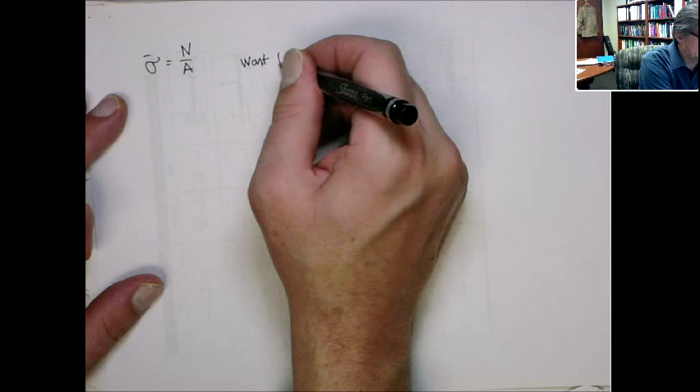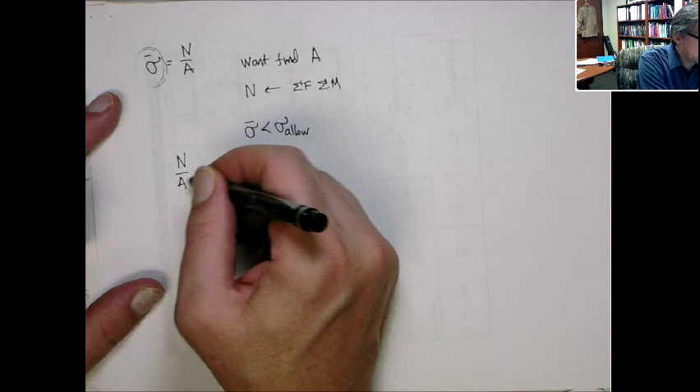We want to find A, right? We know N. We get that from sum of forces, sum of moments, right? And what do we use for this condition? Well, what we're basically saying is the stress has to be less than some allowable stress. What we're trying to do is N over A has to be less than or equal to some allowable stress.

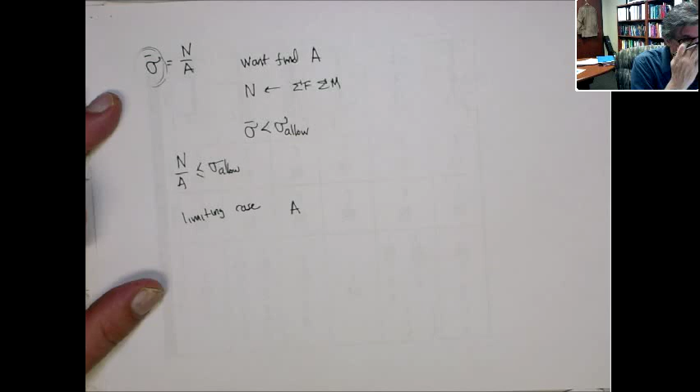So the limiting case is when this inequality becomes equality. Well, let's do it this way. So if we solve for the area, divide by sigma allowable and multiply by A, you get that the area has to be greater than or equal to the normal force divided by this allowable.

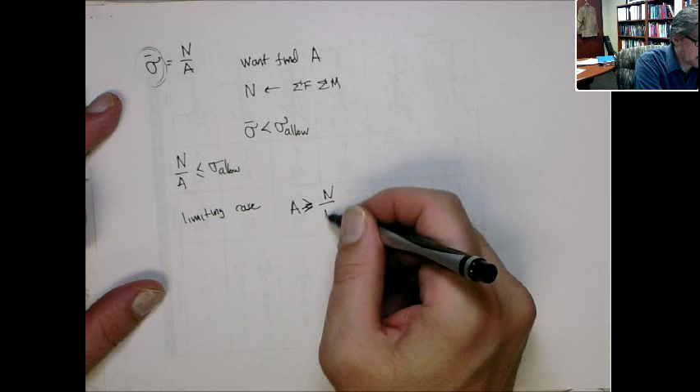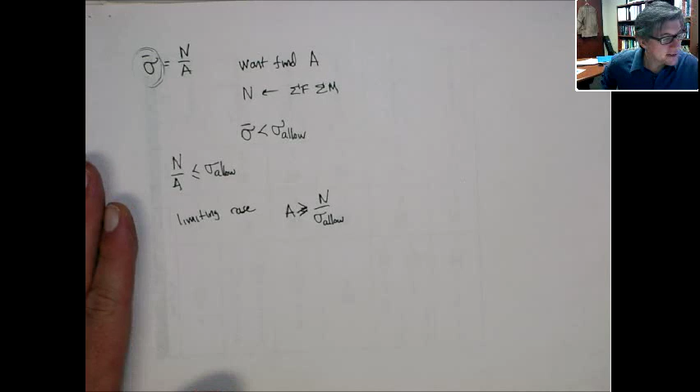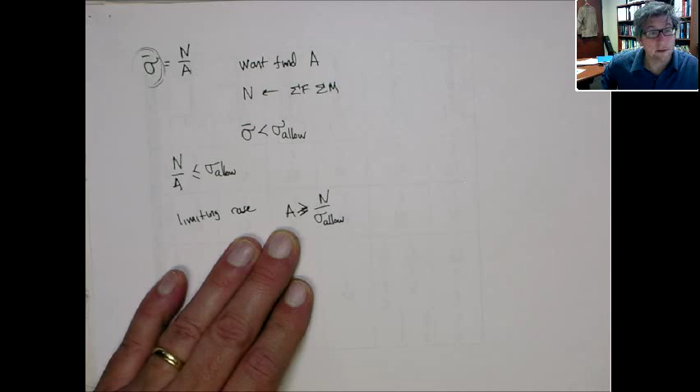Let me just pause here and mention this. This is an important thing to consider. It's always good to have in your head a feel of which way design should go. And I think this is pretty obvious, but as the cross-sectional area in this particular scenario gets bigger, the part can withstand more force, right? It's stronger. I think that's kind of obvious. But you can see it's borne out through this.

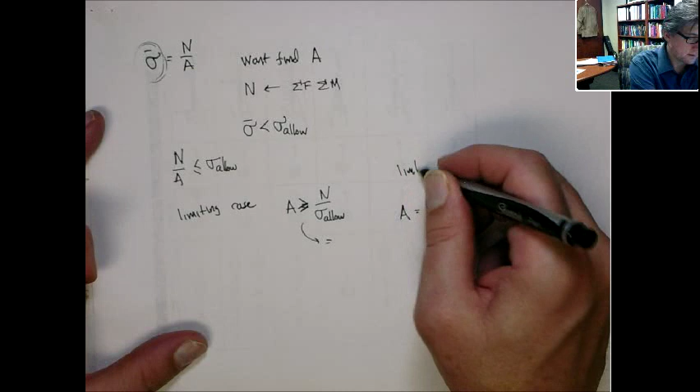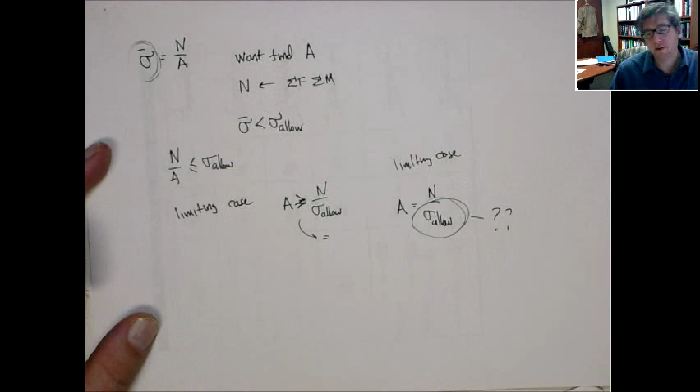So the area has to be bigger than or equal to the internal reaction force over this allowable. The limiting case is going to be when this goes to equality. You can use this to determine the area, or in the way we posed the same problem, we know the area, we know this is 3 inches. Okay. Now what is this allowable stress? One obvious thing would be the failure strength of the material. When does the material fail?

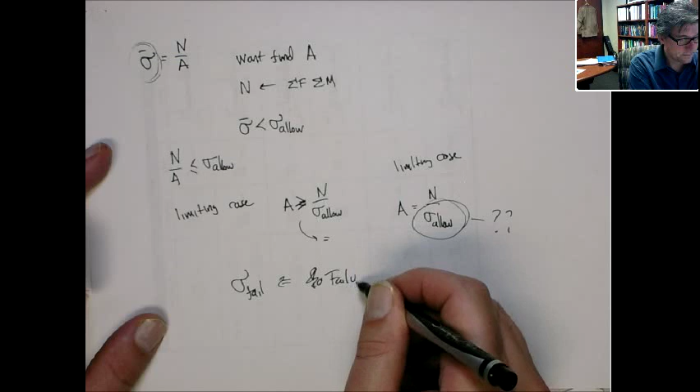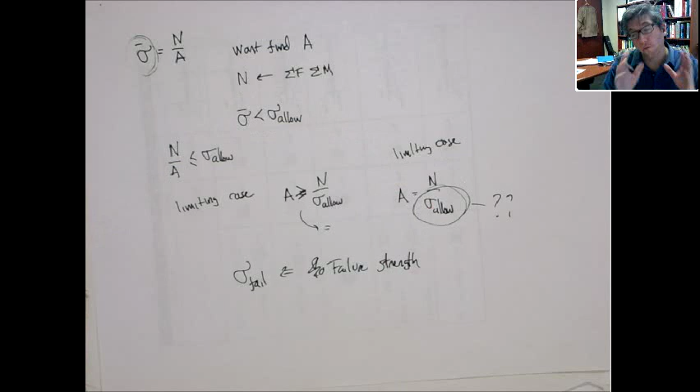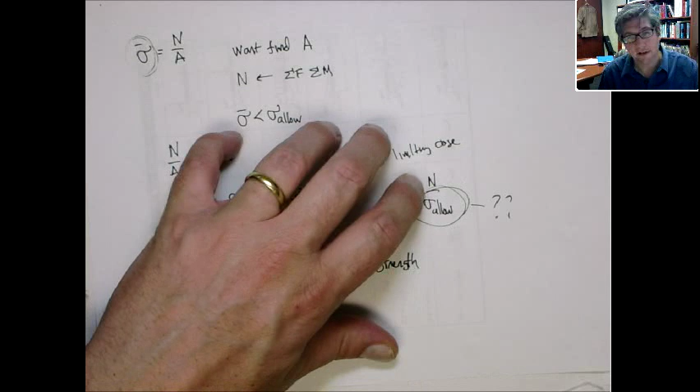This is what we call... now, you can actually test that with a sample material and a test specimen and figure out at what stress the material fails. The problem with that is if we design the area to be that, then you're right at the point where it's going to fail. So for one reason or another, the operating force might go up more than what you think it does. It will fail. Or maybe you have some material with a flaw, something else that actually makes the actual stress at which it fails a little lower than what you tested it at. Again, it fails. So you've designed this part with no margin.

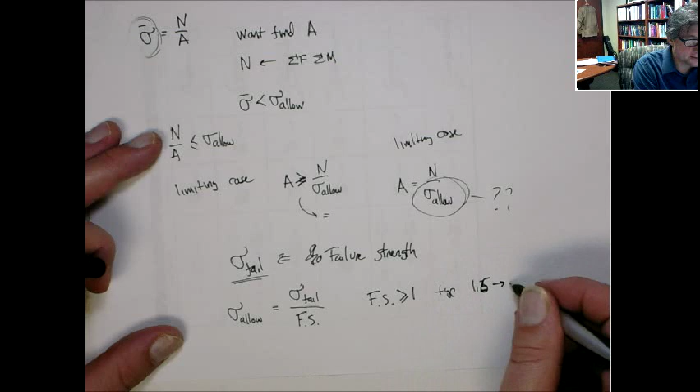That's not what we like to do. We like to have a little margin of safety. In engineering, we call that margin of safety the factor of safety. So instead of using the failure strength, we use the allowable strength as equal to failure strength divided by some number, some factor of safety. Okay? So this factor of safety is greater than, well, in some cases it's equal to 1. Typically it's greater than 1. Typical values are like 1.5, even upwards as much as 4. Okay?

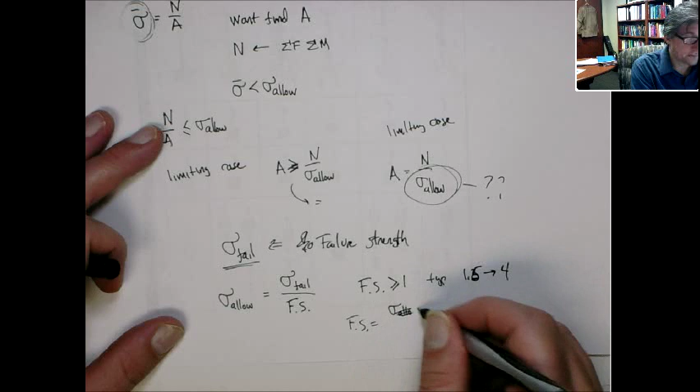So this means the allowable stress is less than the failure stress. So you're actually designed to a lower allowable stress than the failure stress. So that is the margin you have, the difference between the allowable stress and the actual failure stress. The factor of safety is the failure stress over the allowable stress. Okay? Actually, honestly, I use it this way. But the way it's used more often is this way. Okay?

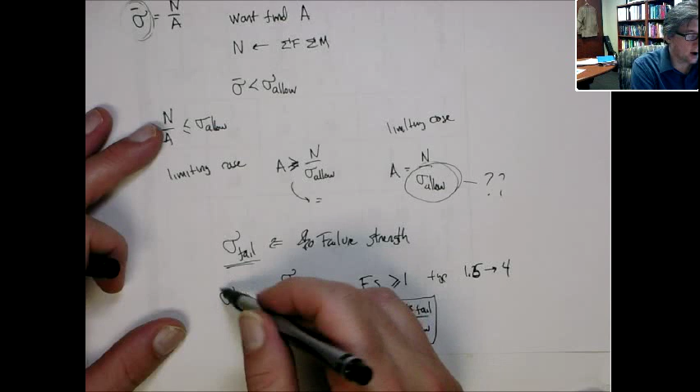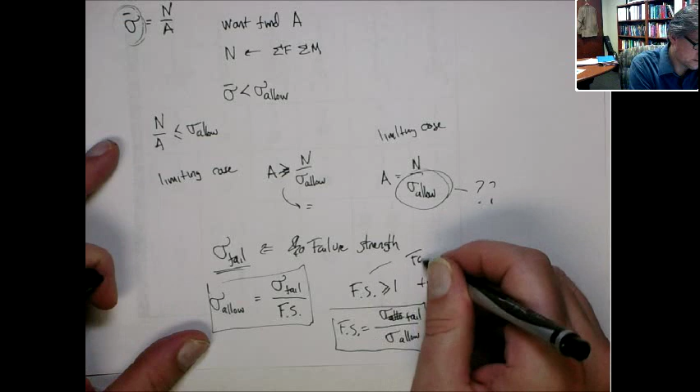Sometimes what students will forget is which is the allowable and which is the failure. You can memorize the equation. I think it's kind of silly. I think this is one of those great examples where it's not an equation you want to memorize, but a concept. The factor of safety, right, is a number that's always greater than 1. It's how much margin you basically have. So if the factor of safety is greater than 1, then the allowable stress obviously has to be less than the failure stress. So that tells you that failure stress divided by the factor of safety is allowable.

Not the factor of safety times the failure stress. That way the allowable stress would be greater than the failure stress, and obviously that makes no sense. The negative margin, right? You're doomed. The airplane is going to crash. Okay? All right, so that's the notion of factor of safety. So let's go back and revisit this problem and just do a real quick example. These concepts are simple, but they're also very important, and I think it does bear some time.

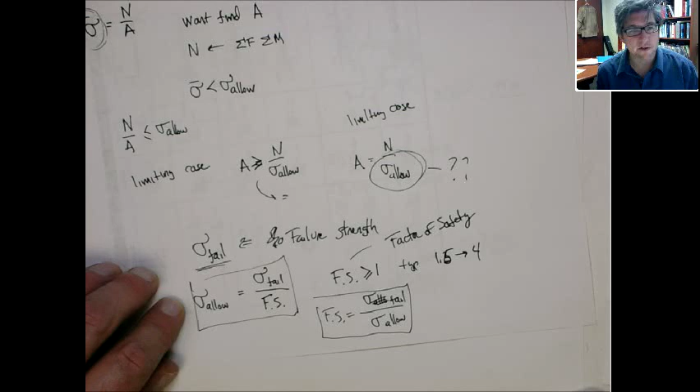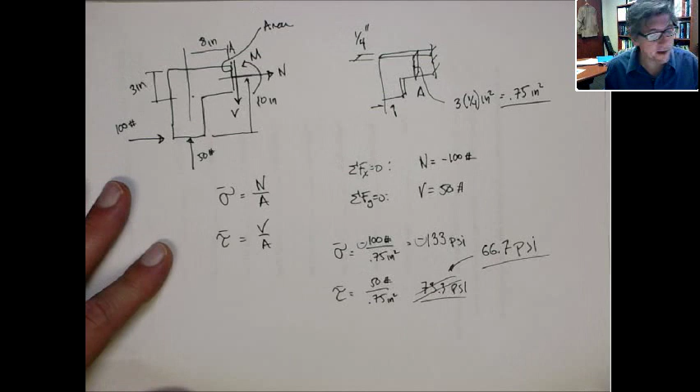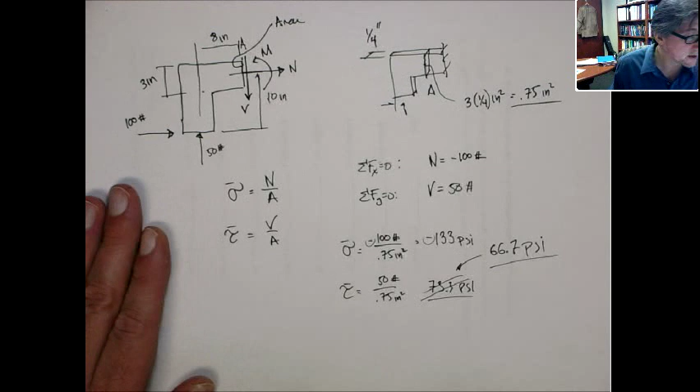Again, this is one of those cases I want to pause. Don't just memorize this equation. Don't just memorize divide failure by factor of safety for allowable. Think about the concept that's going on, what factor of safety is. It's not that hard. We're not talking about quantum mechanics, but this notion of developing a design sense or engineering intuition is really, I think, a strong skill to have. Everybody should always be trying to develop this to become a better engineer. All right, so let's do this as an example.

Let's look at this case. Let's say we don't know what this thickness is. Let's find the thickness. We have to design the appropriate thickness. Let's say that we're using some sort of plastic material, where the normal failure stress is 300 psi. We want a factor of safety, in this case, of 3. We want to be really conservative. So if the failure strength is 300 psi and the factor of safety is 3, that means we have to design this to an allowable stress of only 100 psi. The failure stress is divided by the factor of safety. This is what we're designing to.

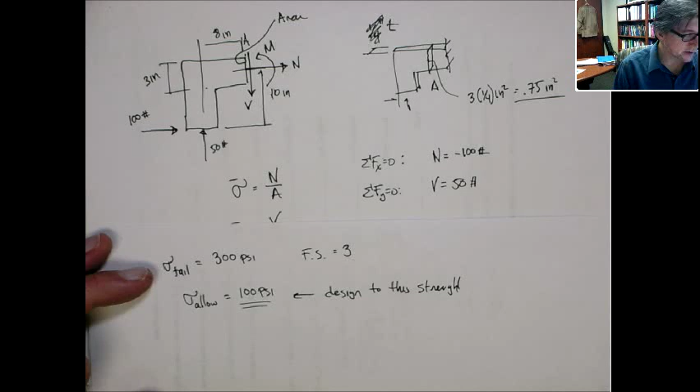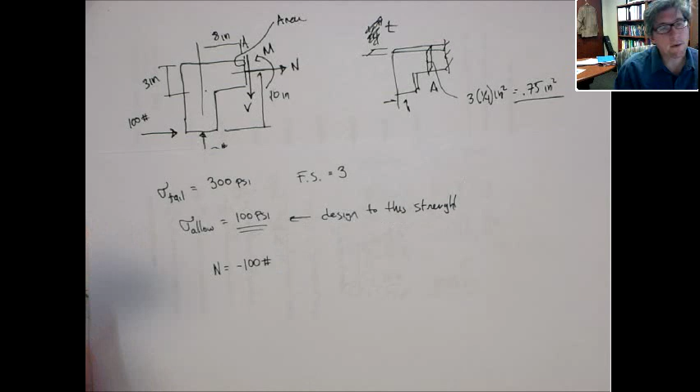Another way to think of it is we're considering allowing the material less strength. All right, so if that's the stress we're designing to, it's the same geometry up here, so the normal force is still minus 100 pounds. So this is compression. Now, for most materials, unless it's stated otherwise, when you have a failure strength, let's assume it is the same in compression and tension. Sometimes we have different compressive strengths. Let's assume it's the same. All right. So we need to figure this out.

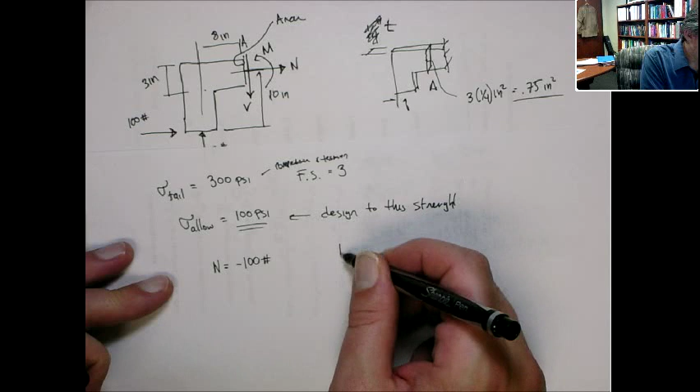Normal force over the cross-sectional area needs to be less than or equal to this allowable stress, right? That's our design equation. And we need to find A. We know that A, in this particular case, is going to be the thickness times 3 inches. That is that cross-section. Okay.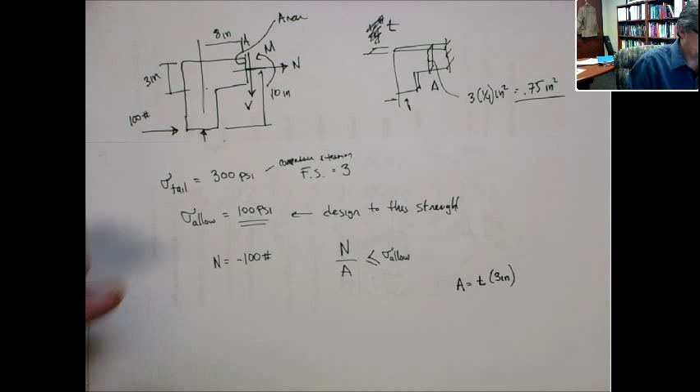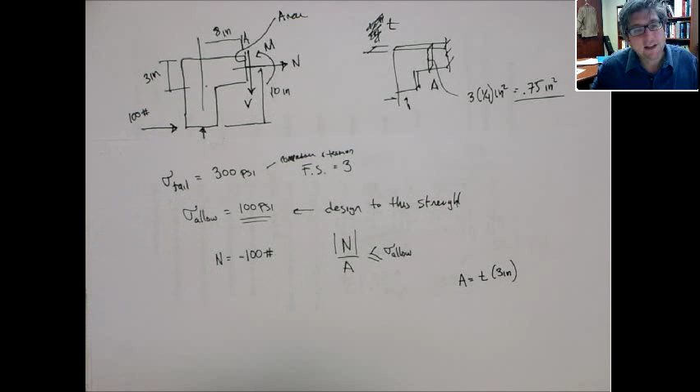Now, let's just talk about the sign. Obviously, if I put the negative in here, this becomes a negative number. So you really want to look at the absolute value. I think this is kind of obvious. I don't want to get too much into the math of it, but in this case, we're looking at the absolute value. If you did it without considering the absolute value, you would keep increasing the compressive load to infinity, and you're always going to be less than your negative number. So it's really the absolute value. Okay.

All right. So let's find the area. In the limiting case, the area has to be greater than or equal to this force, 100 pounds, divided by the allowable stress, which is 100 pounds per square inch. The pounds cancel out, so this is equal to 1 inch squared. That's the cross-sectional area. So the area has to be greater than or equal to 1 inch squared. 2 inches, 3 inches, whatever. But the limiting case is the area of 1 inch squared.

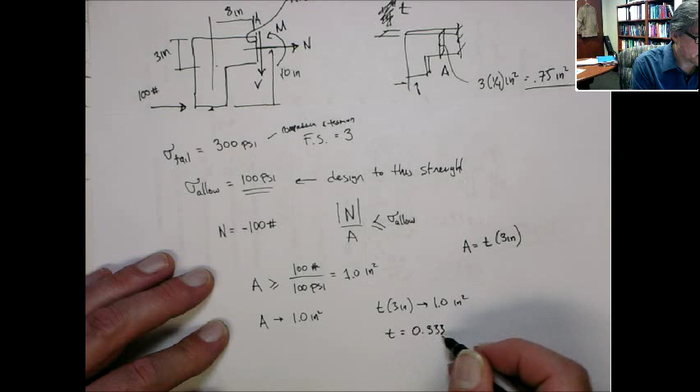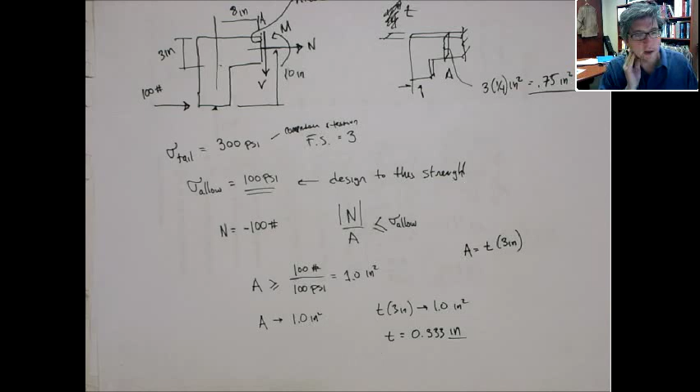Now, use that here. We want T times 3 inches to equal 1 inch squared. That's the limiting case. So that tells me that T has to equal 0.33 inches. That's the minimum thickness. It can be greater, but as soon as you drop the thickness lower than 0.33, stress will go up and exceed the allowable value. Sometimes we're going to do design problems where the dimension gets smaller and the stress goes down. So it's not always that the more conservative estimate is when the value goes up.

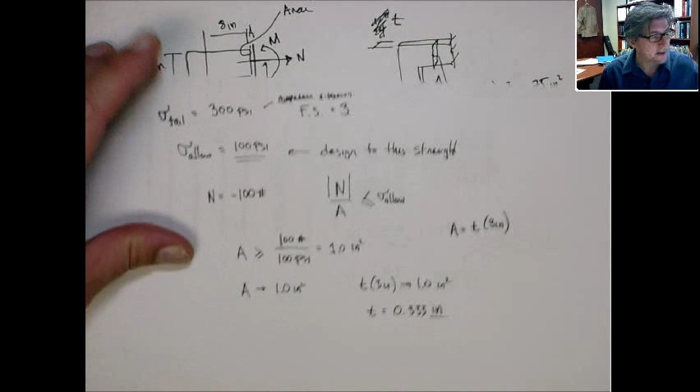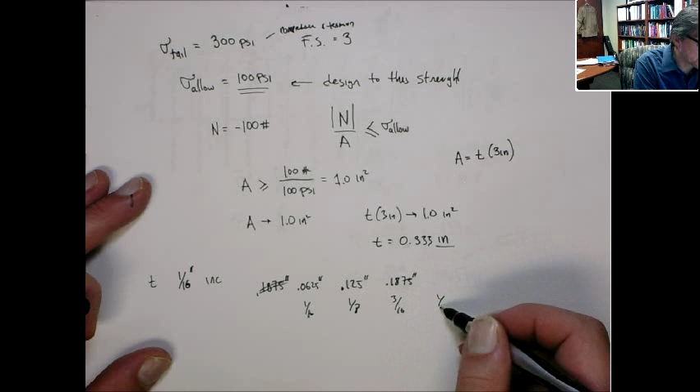Now, another way you'll sometimes see this problem written is that plate thicknesses might come in standard stock sizes, maybe in 1/16 of an inch increments. So 1/16 is 0.0625 inches. The next one is 2/16, which is 1/8, 0.125 inches. The next one would be 3/16 of an inch, which is 0.1875, and a quarter of an inch is 0.25, and so on. The plate only comes in those thicknesses. So the design problem might be: find the thickness of a plate to the nearest 16th of an inch that'll give you a factor of safety of 3.

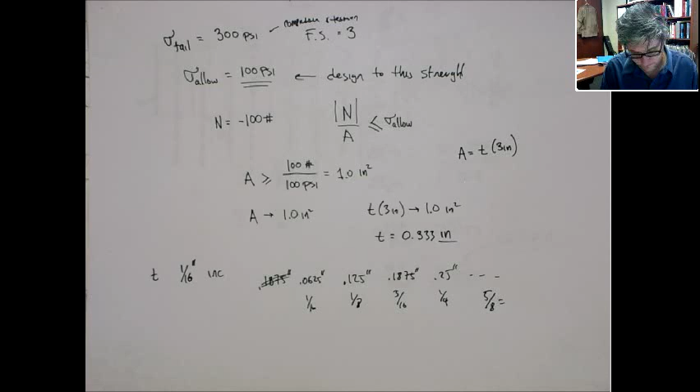Now in that situation, 1/3 is somewhere in between. What's the next one? Three-eighths is 0.375 inches. Okay, so that's on the high side. The plate below that is 5/16, which would be 0.3125. So this situation falls in between 3/8 thick and 5/16 thick plate.

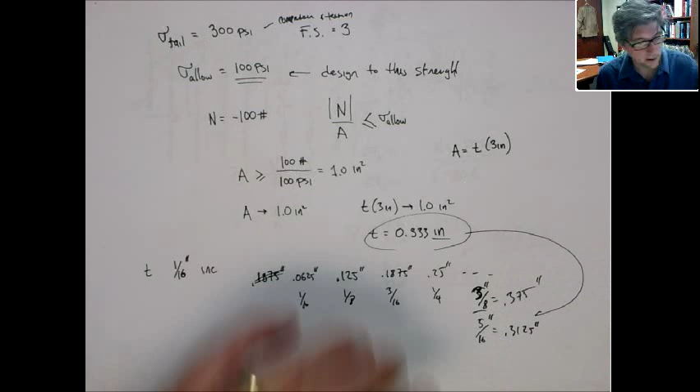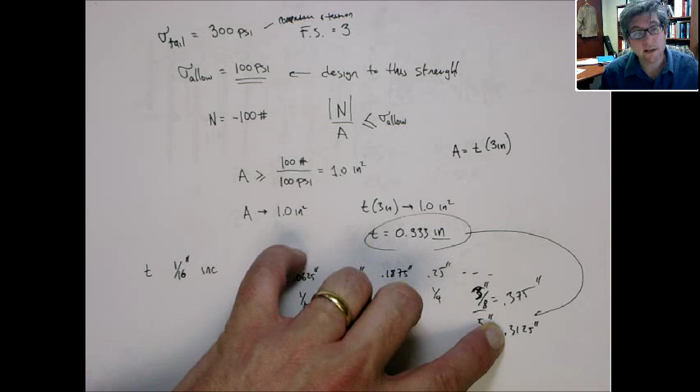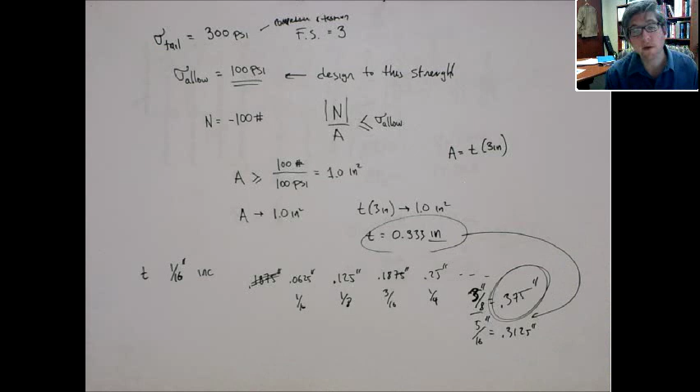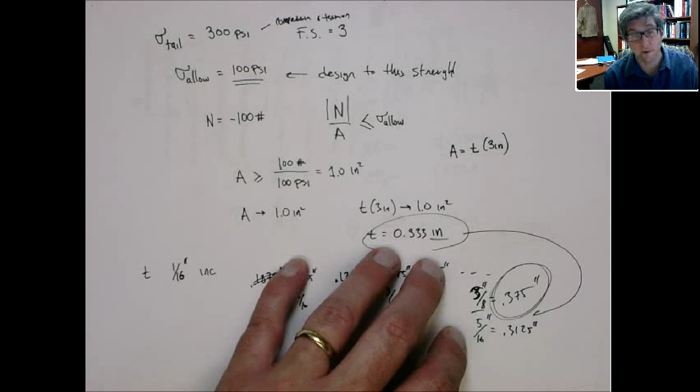Which one should you use? You might go to the thinner one, since that's actually closer, but the factor of safety is then less than 3. So when they say find the nearest 16th or whatever, you always have to go as a designer to the more conservative value. So in that situation, it's actually 3/8. You want to use 3/8 plate, because that will give you a factor of safety greater than 3. Even though 0.333 is closer to 5/16, 5/16 will give you a factor of safety less than 3, so it would not meet this criteria. You have to go to the more conservative value.

Sometimes that'll mean the dimension actually gets smaller. Maybe it's a hole; the more conservative value might be a smaller dimension. Sometimes it might be a bigger dimension. But you figure that out. When finding it to the nearest quarter inch, whatever, you always want to go in the direction that makes it more conservative. All right. That's all I wanted to say about that.